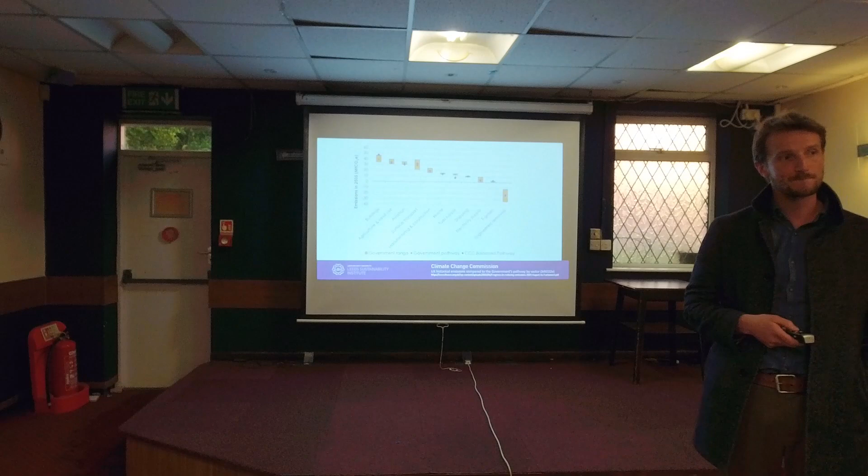But of course, once you build it and build it right, it's there for a couple of hundred years. No, it's a great question. This is operational carbon emissions for buildings, because the construction industry is there too - so that bit is building. You could add those two together and it's an even worse story, but all we're going to talk about today is operational energy consumption.

And there's a whole other area of research we can talk about, called embodied carbon emissions - things like, is it better to use wood or is it better to use concrete, that sort of thing.

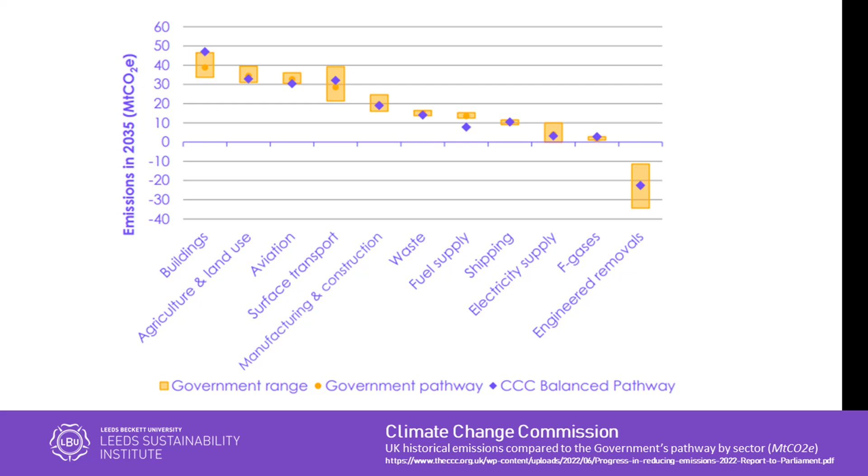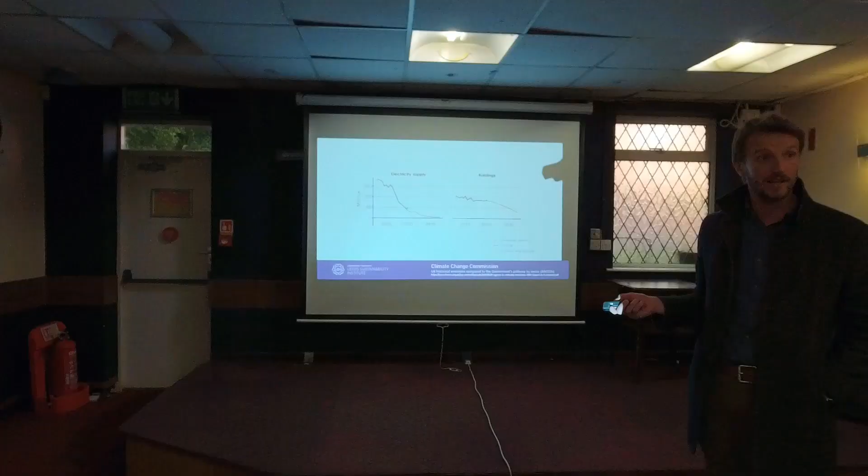At this point there's a colour change - not everybody might be able to see it - which marks the prediction, so they're predicting into the future. The electricity supply just carries on in the curve, maybe tails off a little bit, so that seems okay. For buildings, we're sort of flatlining, and they're just anticipating that suddenly we're going to make a load of reductions.

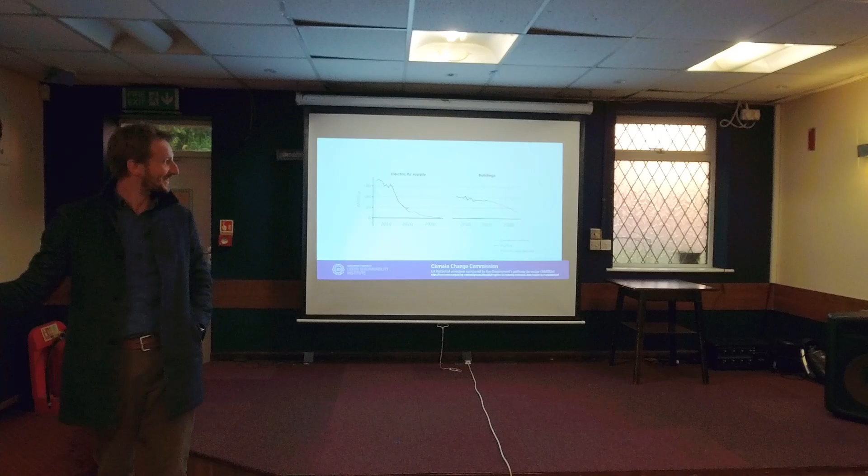Am I in your way? Can I move a bit? Cameraman, am I allowed to move this way? My fault for saying I've got some people - if everyone doesn't block... then I've blocked these people here. Do I stand up? Yes. No, now - how about this side? Stand. Yeah, better, a lot better, yes. Cameraman, happy? I can point, I don't need this now.

That's good. So we've basically done nothing for the last decade in buildings, but we need to make a reduction. So how are we going to do that?

Is that due to government policies? Partly, yeah - well, mostly. Subsidies to lots of things being withdrawn. So the question was, is it just because of government policy? Well, government policy exists to solve market failure. So the government didn't cause the market failure, but it certainly hasn't fixed it.

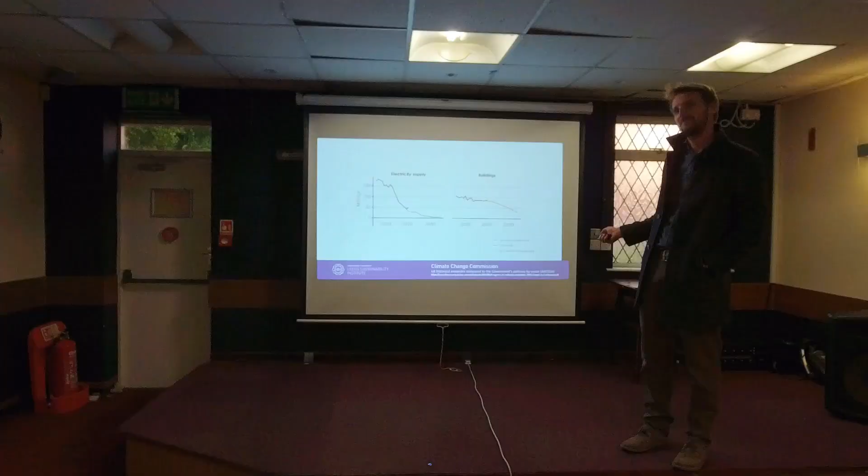You did say that line downwards for buildings is what we need to do, rather than that sort of forecast. Yeah, so it's the government pathway. I would give it a different label if it were me.

Okay, but we have decarbonised our economy quite a lot. And how have we done that? We've stopped using coal. This is a graphic which shows the coal use in the UK over time, and you don't need me to explain it because there was a lot of coal use and now there's not very much - that is a really significant change.

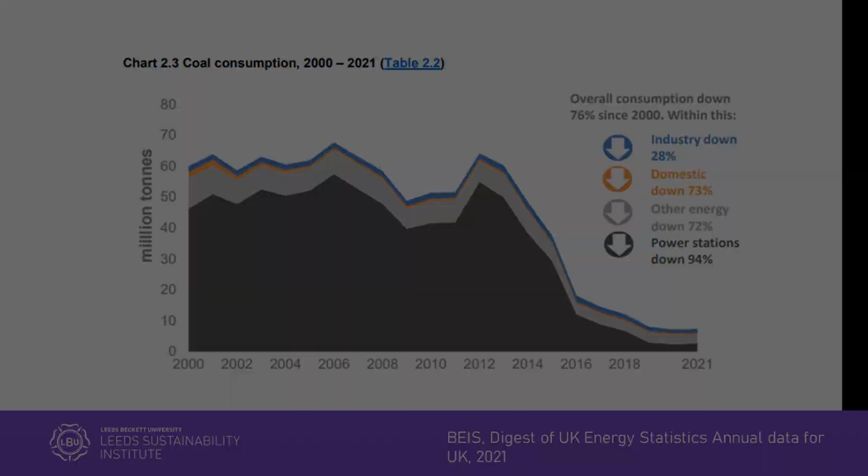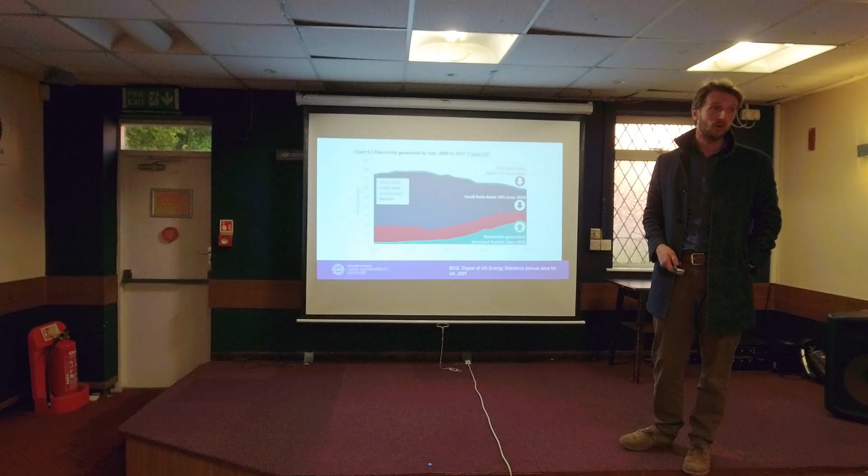But we've replaced coal, so we're using a lot more gas to produce our electricity - we're still relying on a lot of fossil fuels. This graphic shows all fuel use for making electricity, so electricity doesn't just come from coal, or it didn't just come from coal, it doesn't just come from oil, it doesn't just come from gas, it doesn't just come from nuclear - it's a combination.

So over time, we've reduced our reliance on coal, but we're still using a lot of gas. There's a bit of red which is nuclear, another topic we could discuss but perhaps not for this talk. The green is renewables, so we're replacing a lot of the blue with green, and that's great, but there's still a lot of blue left, which is the fossil fuels. But we have reduced total emissions as well, so we are actually generating less.

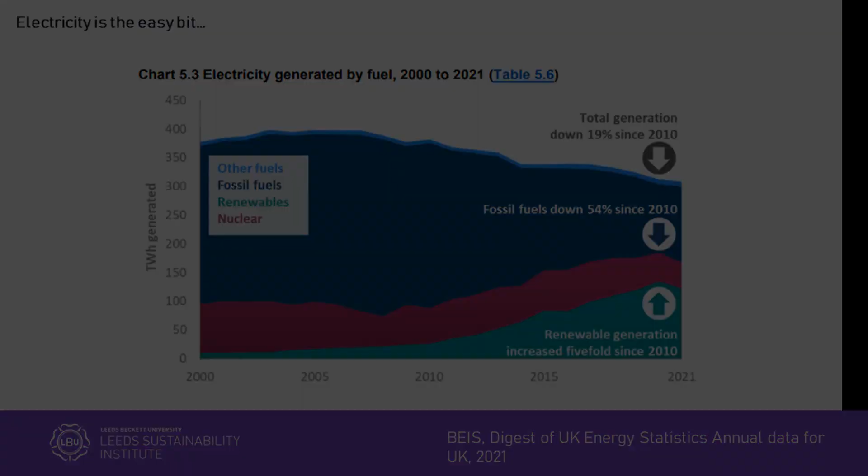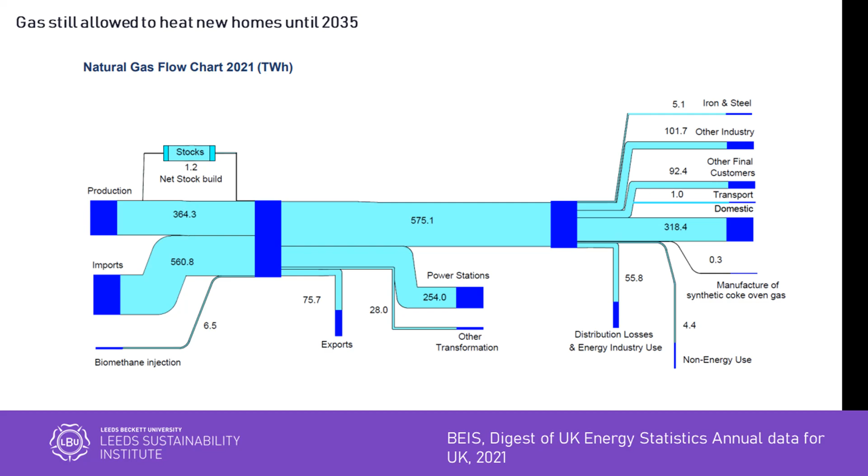So we're still using gas, and that's a real problem because most of it's to heat our homes. It's really hard to just switch your heat to renewables the way we're switching our electricity to renewables. We can continue to switch our electricity to renewables, but it's really hard to switch our heat.

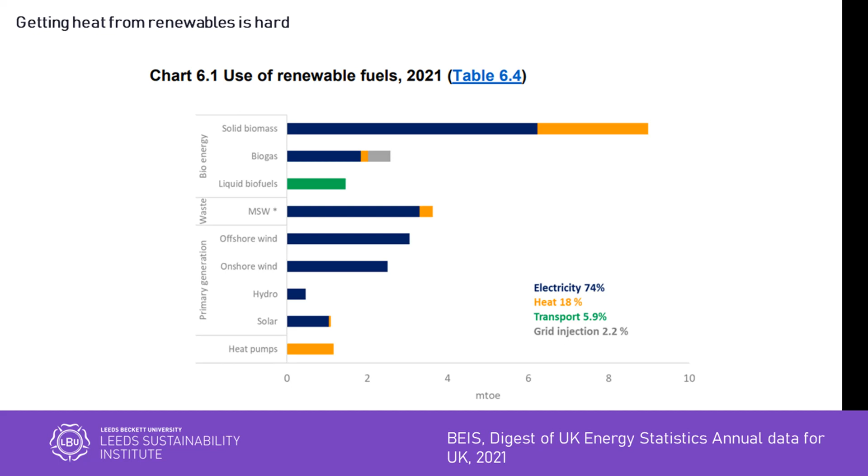This is a graph showing all of our different types of renewables. We've got biomass, a bit of biogas and liquid biofuels, waste incineration like the one over in the Leeds Cross Green area, then offshore wind, hydro, solar, and heat pumps. All of the blue ones are electricity, so almost all renewables is for electricity. It's really hard to do heat with renewables. There are good reasons for that, I'll show you in a bit.

So why don't we just use all of that electricity that we can apparently turn green to heat our homes? Surely that's just a natural thing to do. If we can make green electricity, we must be able to make green heat, just use electric heaters. And then we come to my favourite graph of the talk, which explains why we can't just switch over to using electricity to heat our homes.

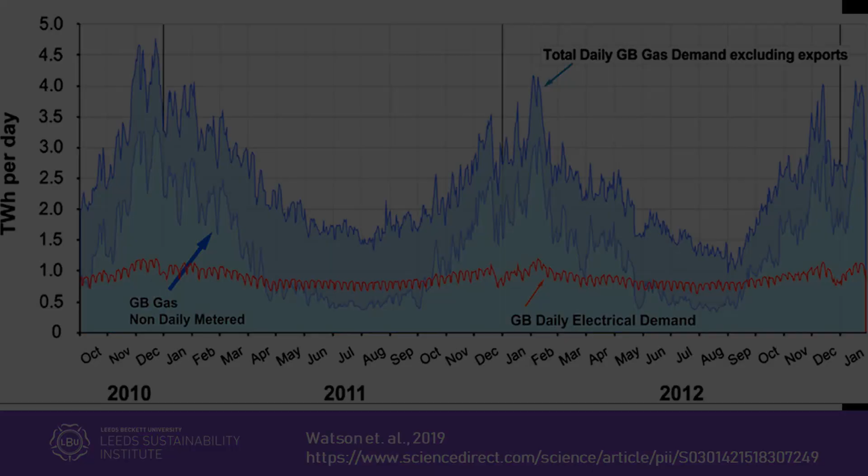This graph shows our annual energy consumption for gas, counting through summer, winter, summer. You've got this big spike, it's Mount Everest in the middle. Our electricity just sort of flops around a bit, like the Yorkshire Dales, going up and down but nowhere near the Himalayas. We call that peak heat. So everybody in the morning on, say, the 7th of February, it's cold and turns the heating on. We use a tremendous amount of energy to heat our homes, more than three times the amount of available electricity.

So if everybody suddenly had electric heaters instead of gas heaters, the grid would blow up. It just couldn't do it, it just couldn't cope.

So you've all probably heard of heat pumps, for right or wrong. The idea is you can get three units of heat for every one unit of electricity that you use, so you don't just use one for one.

Am I losing anybody at this point?

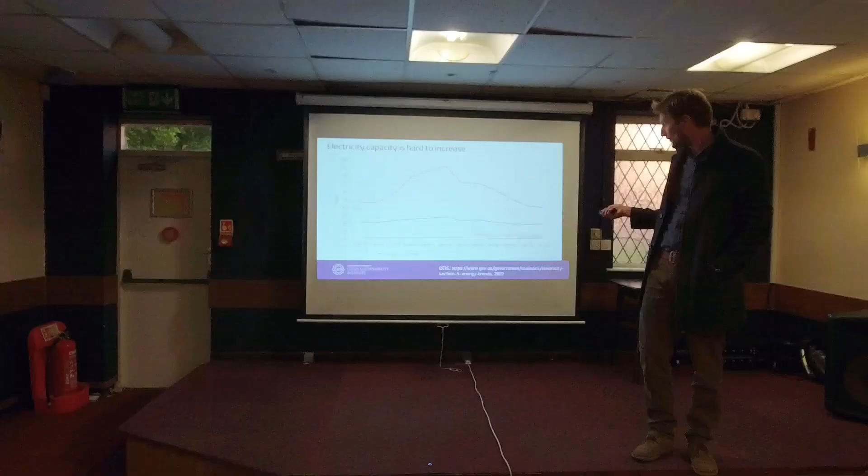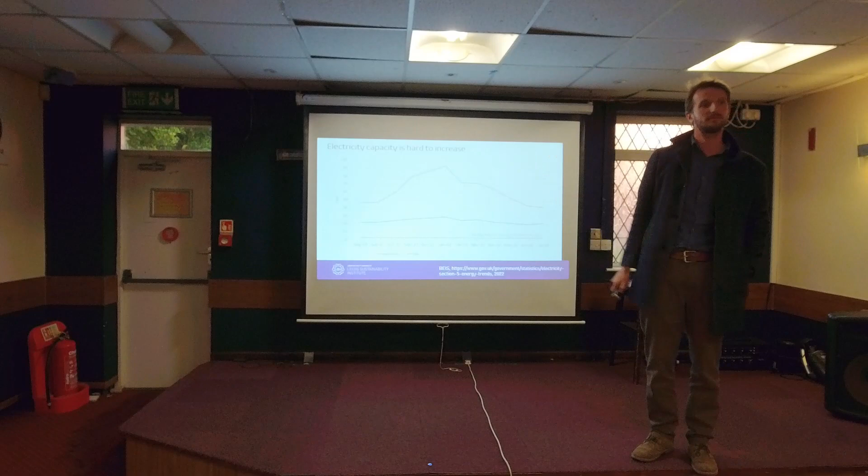I'm about to throw onto the line a nuclear power station. So that's one nuclear power station, that green line. Did you see it go on? Yeah. So how many would we need to crank it up from the Yorkshire Dales to our Mount Everest? It's just way too expensive, even more expensive than retrofitting homes.

And the government knows this. This is their main concern. This is why they want to retrofit your homes. They say it's because they want to keep you nice and warm and reduce your fuel bills, but it's because nuclear power is so expensive.

Okay, so why don't we just build new efficient homes? Why can't we all just live in new energy efficient homes? Why do we have to have homes that use so much energy?

So what we're going to do is talk about the Energy Performance Certificate. Many of you will have one of these, and many of you who do have one won't know that you have one. Does everybody know what an Energy Performance Certificate is or should be, even if you don't have one? Yeah, okay, so it's a guess, an educated guess, at how much energy your home uses.

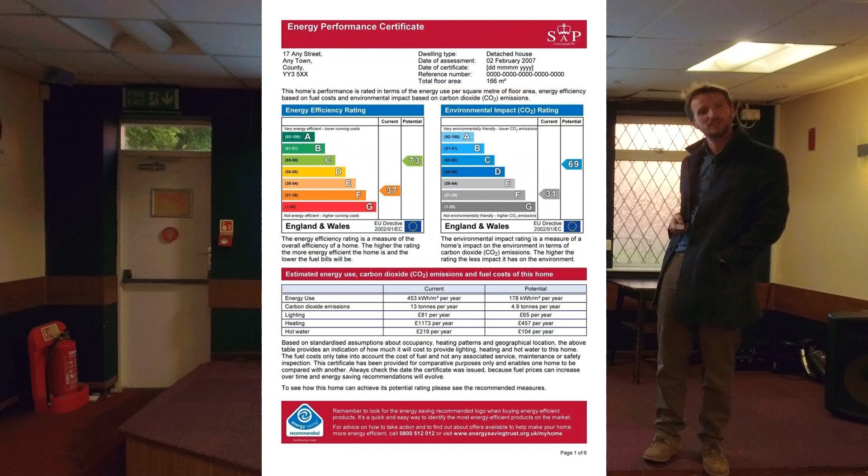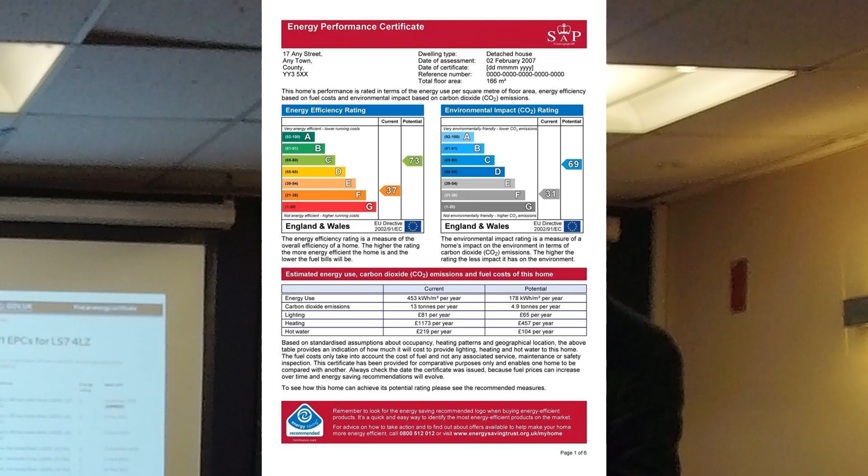This is what they look like, and you can go and look yours up, or look your neighbours up, or look up 10 Downing Street, or anybody's EPC if you want to. It's all freely available, which you may or may not know. Basically you get this colour coding mark, like you get on your fridge or your TV. It gives you a ranking, because that's what the government thinks the level of information we need is: colour coding.

I do tend to agree sometimes, but anyway, let's have a look. So this is that colour coding. The colour codes go A, B, C, D, E, F, G. A is the best, and G is the worst. So they're in the colours, I hope you can see the colours.

So that's the percentages over there. What we're going to do, and this is the number of homes, and this is everybody - let me just check it works. So we're going to see, well, the question I asked at the beginning of this set of slides was, why can't we all just live in nice new homes that are efficient anyway? So I'm going to add all of the new homes that got produced in 2021 to the graph, and you're going to see what happens.

Did you see it? I'll take it off. I'll do it again. Right.

New homes are great, but they're meaningless in terms of the scale of the problem. So they're a distraction sometimes. They can sound good, they're flashy, and politicians like to say they're building lots of new efficient homes. That doesn't scratch the surface of what the major challenge is.

Government have a requirement to get almost all homes to a C. There are exceptions you can get if you live in particular, peculiar, or unusual homes, which is fine, and that should exist. So currently, 60% of us are not at the target the government wants us to be at.

The interesting thing, I don't know if anyone picked up on it, is why are these new homes on B? Why are they not on the A? Building regs don't require it. That's another talk. Okay, fine. So we have to sort out the new homes.

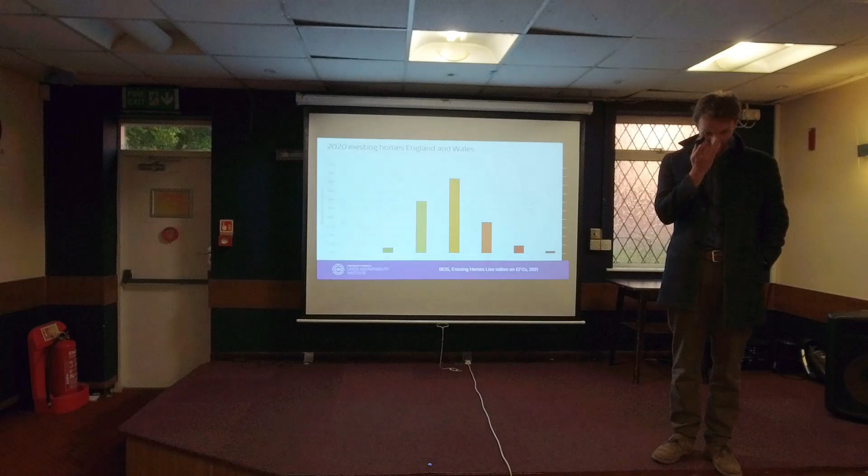So this is the same graph. What I'm going to do is outline them in black, put a black line around them. What's going to happen this time is, I think the black lines are going to stay the same to remind you what they were like in 2020.

And then the colours are going to change to show you how successful we were in 2021 at bringing homes up to a C. That's it. So that was it before, and this is it now.

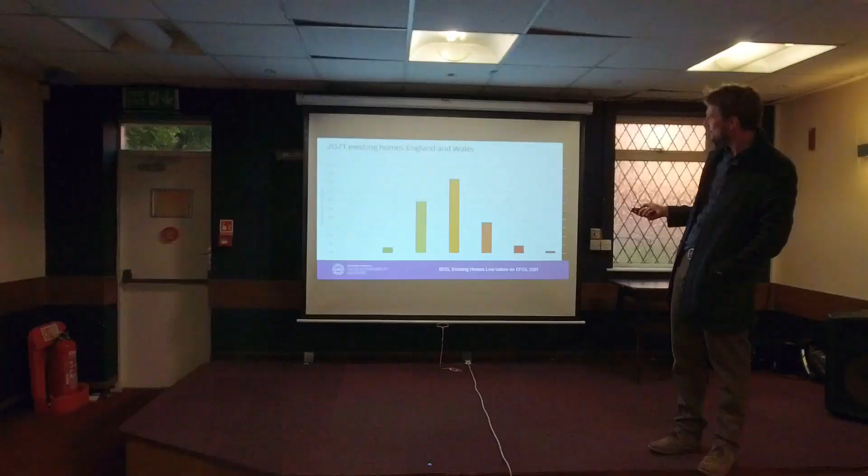So what's happened is the other way around. All we've done is taken a few E's and dumped them into D, and a few D's and dumped them into C. So the new builds aren't going to solve it, and the current approach to retrofit isn't going to touch it either.

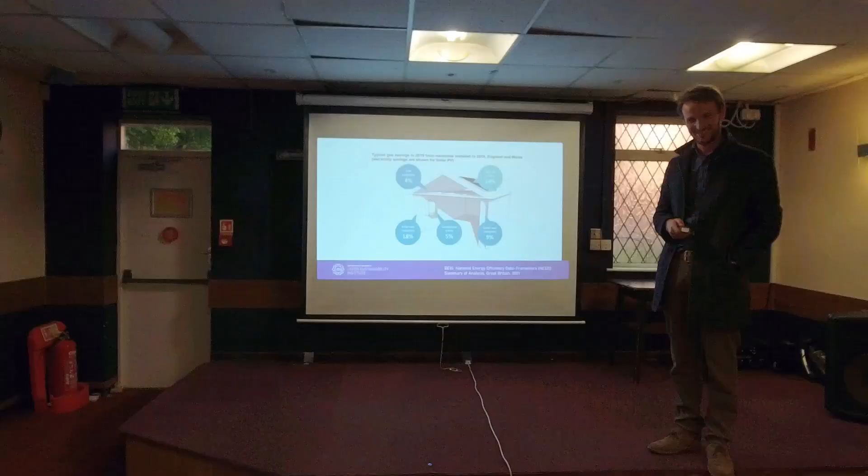I'm trying to remember if there's a positive slide in here for you all to go over. Right, we are saving energy in homes. Some people do, so that's the whole country, but some people get really good help, and there has been a lot of progress. So this is a slide to show you what the government says these sorts of technologies, or these sorts of retrofits, can save you on your fuel bills.

Now, they're actually a lot lower potentially than you might have thought. So if you insulate your cavities, so you've got a cavity walled home, it's uninsulated, get it insulated. Does that bring you up to a C? Does it mean it's fixed your heating problems? No, because cavity wall insulation only saves you about 9% of your fuel bill. So you've still got a lot of heat loss going on.

A new boiler will give you 5% saving. Loft insulation, 4% saving. That's because most people have already got a little bit of loft insulation. If you had zero loft insulation, you would still save like 10% or something.

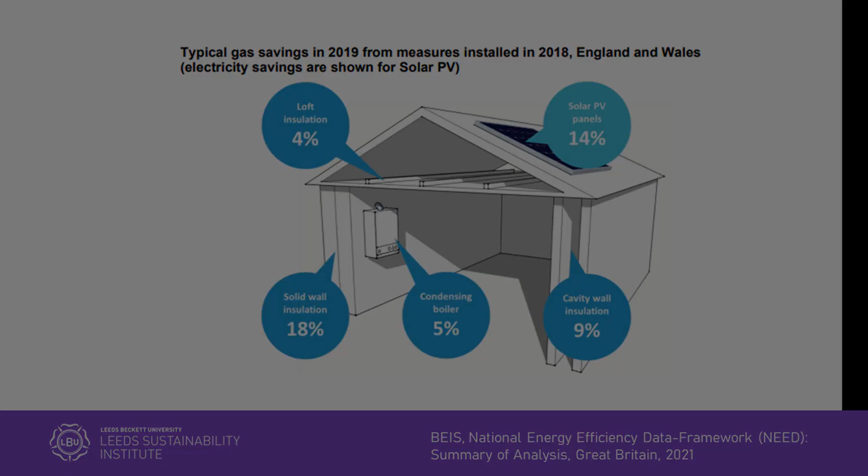Solid wall insulation, which I'm going to talk about later if there's time, I'm talking too much already. We're going to talk about solid wall insulation later. That's just to show we were making progress, but we've not been making progress for the last decade because of energy prices.

This is another depressing slide to show that each of these different colours is a different type of insulation, and over time, the performance of these drops. It's really obvious when you think about it. You put stuff in your loft, then you've disturbed your loft insulation. You don't clean your solar panels, they don't produce as much, so just something to look out for.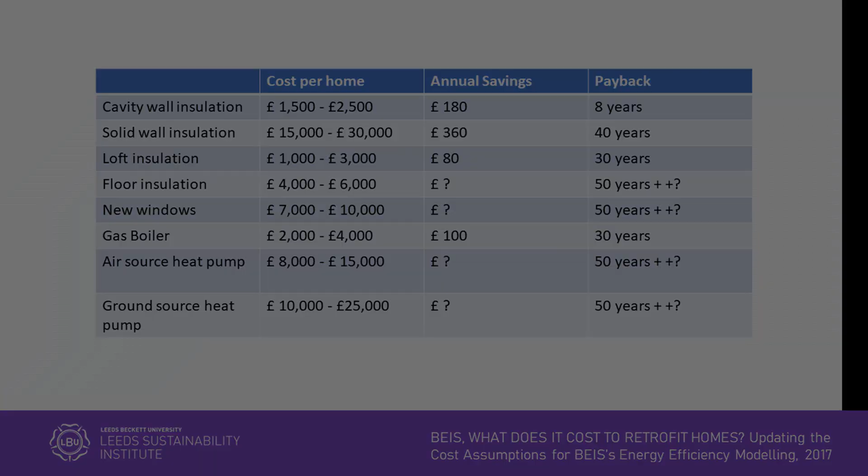The most recent research we've done is over 50 years for a lot of these. So to ask us to pay for it is a hard pill to swallow if we're only looking at cost. And there's another talk about all the other wonderful things that retrofitting your homes bring you other than just fuel bill savings. This is just one of them: the NHS have identified that excess cold in homes can potentially cost almost £900 million a year.

So the savings to society, if we saved it, would be 15.3 billion. So there is a very strong argument that it shouldn't be up to us to retrofit our homes.

So in 2013, they could have just said, we're going to have a 20-year or even a 10-year long policy, which means you can invest in getting the supply chains and market conditions ready to insulate homes. But they didn't do that. They said, okay, we're going to have a 2-year policy here, then another 2-year policy, then we'll extend it by 2 years, then we'll switch again and have another 3-year policy, and we're currently in Eco 4, which has got a 4-year policy.

That was only possible because of the co-heating test that we produced, which looks like this. It's an incredibly boring thing: we heat up a home, we know how warm it is, we maintain a certain temperature inside a home, we know how much energy we put in to keep that home at that certain temperature, and we keep it there for 4 weeks.

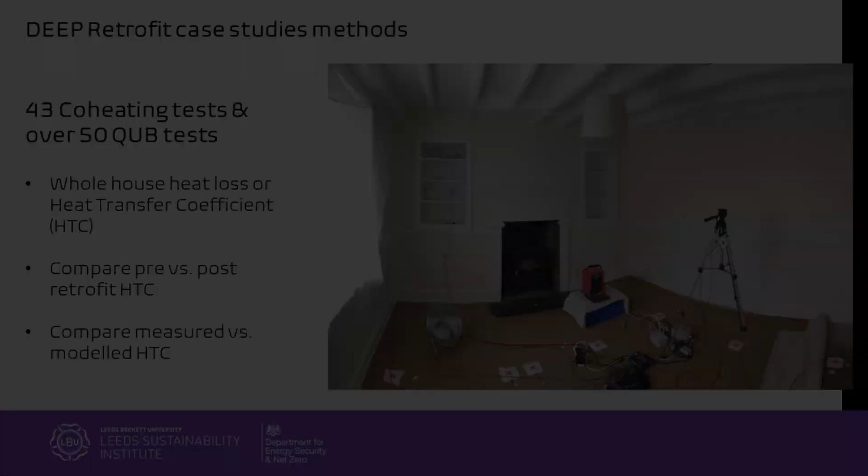And we know how cold it is outside, we know how much sunlight is hitting the room. What we can do is a very simple energy balance, with a little bit of complicated maths, to get an overall average amount of energy that house has to use to increase its temperature by 1 degree. It's as simple as that, and nobody else had done it. Now we've published guidance on the protocol for doing this test, and it is now the standard used internationally. So it's a really big deal.

But we don't own it, we've given it, so everyone now references our protocol. And what that means is other people were able to verify the things that we were finding. So we did work with Joseph Rowntree and York City Council 30 years ago to say, I don't think your buildings are built properly. They don't match the designs that you've been given. You're paying for buildings that aren't delivering. So the house builders didn't listen to us for 20 years, and then eventually other people started using the tests, and now we have identified that there is a performance gap.

And this is what that graph shows. So this is just a test of 32 homes, something like that. The white bars is what the house should have used. The black is the extra that it used. So these are brand new homes, not retrofitted. These are brand new, straight off the production line. This chap uses more than double what it was designed to. Most of them are minimum 10% more than they should have done.

And I guess I'm quite sympathetic if they've got a little bit more energy use than perhaps they should do. But this is not really acceptable.

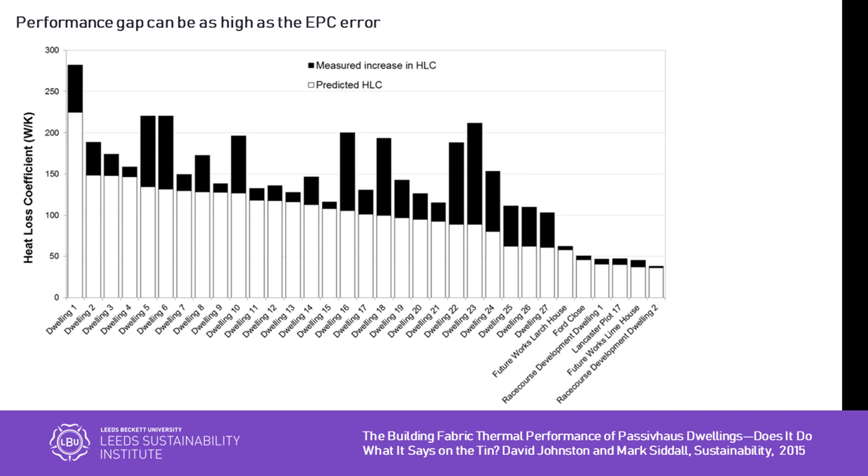Really good homes that are very careful, you might have heard of some of these, they're called passive house homes. They still have about a 10% overshoot. But that's fine when your absolute number is tiny. 10% of 10 pence is 1p, who cares? Whereas 10% of £5,000 is a lot a year to ask someone to pay, let alone if you're up at 50%.

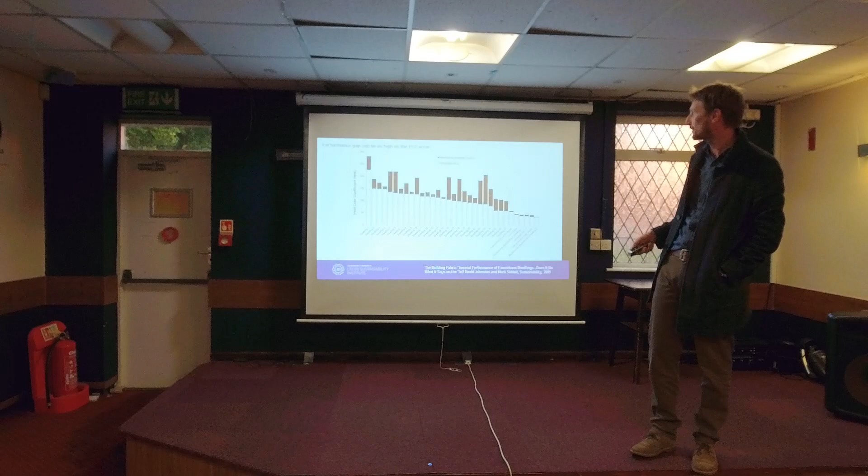Okay, so that's where we came from. This is why we keep doing what we do.

But we've moved beyond just that test, so we now look at how people would use heat pumps more effectively. That's another talk we can do. This is about who the heck is going to buy a heat pump. That's what that project was designed to do.

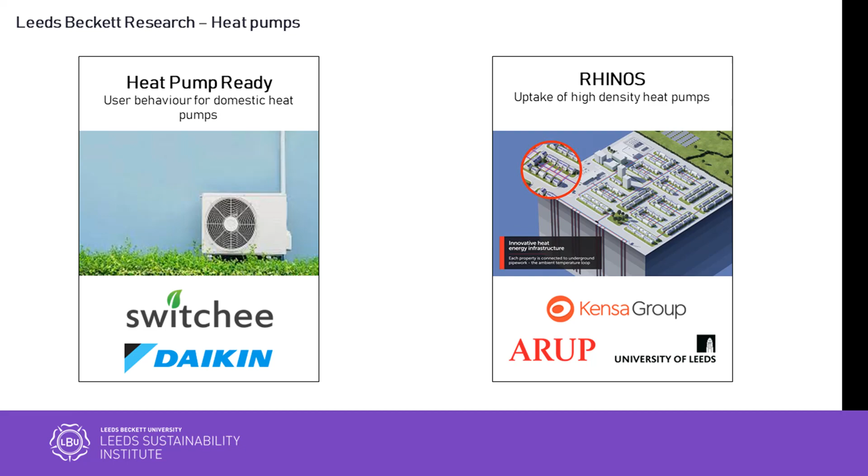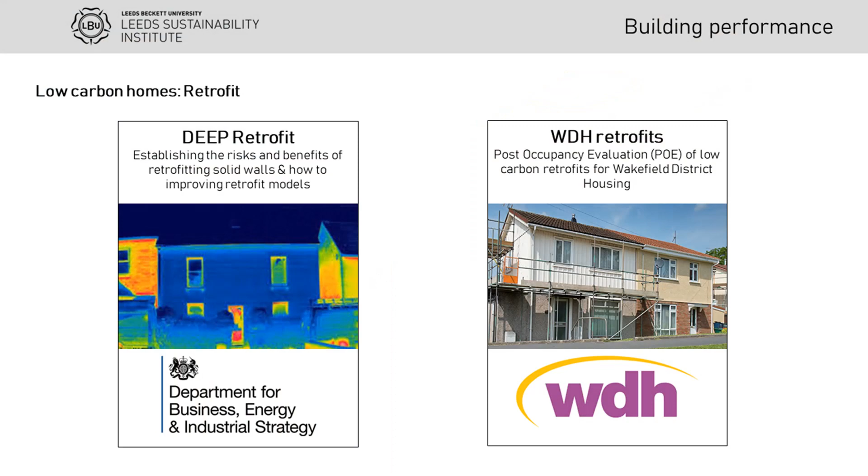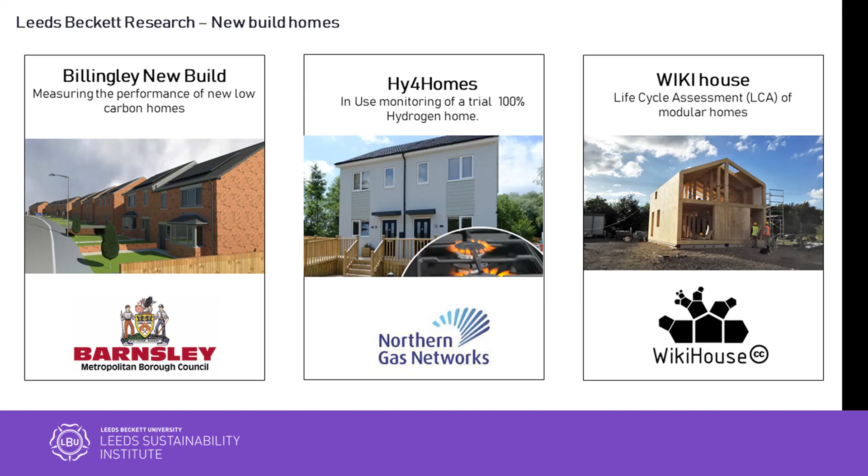Similar situation here - someone's gone and done a retrofit. They want to know if it works, so they get us in to test it. And they want to do that on a national scale. The problem that we've got at the moment is lots of different people go in and check retrofits in lots of different ways, and no one can compare retrofits between Leeds and Manchester and London and Paris.

Okay, so the UK Green Building Council asked us to look into how we can standardise how we assess retrofits. And this is the project I'm going to talk about today, the Deep Retrofit research project. So this is a government-funded project, £3 million, 3 universities involved, we were the lead, and we retrofitted 14 homes across Yorkshire. These are solid-walled homes, except this one, which is a non-traditional home. We put in loads of different stuff.

The idea is they wanted to know what happens when you retrofit. Does it save the energy it should save, or doesn't it? Also, one of the major problems we've got with retrofitting solid-walled homes is it's so blooming expensive. Do we have to do the walls, or can we just do everything else? Because we'd much rather do that. So we looked at that as well.

And one of the things we talked about as well is how do you do it in a low-risk way? And that's what this whole house approach thing means. Over the course of the last 30 or 40 years, all of our homes might have had double glazing, maybe, and then maybe loft insulation, maybe new doors, maybe some of us have got cavity wall insulation. But each time, only that one thing was done.

If you don't consider how the loft insulation interacts with the wall insulation, you can cause moisture problems at the junctions. Do we need to worry about that, or is it fine? That's what we were looking at in this instance, so we deliberately did it wrong to see how bad it was, and then we made it right.

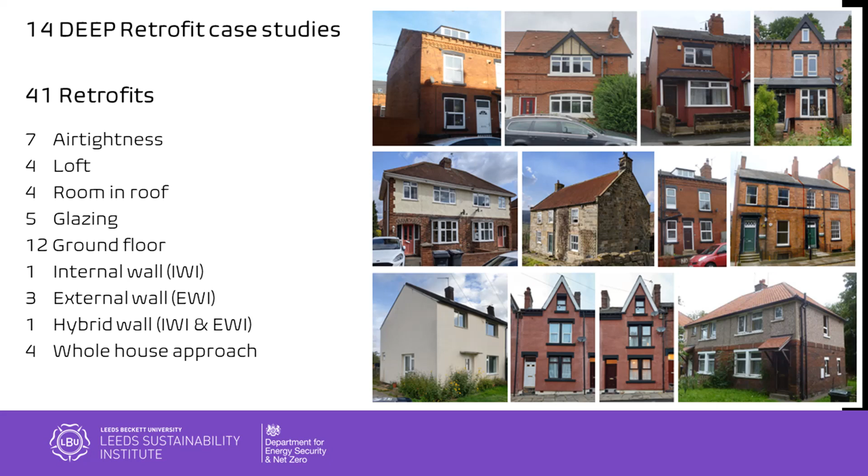So we looked at social landlords and private landlords. Some had very good reasons for not partaking in the research. If we've got the house for a year, that means a family doesn't have the house for a year. So that's fair enough. Often the institution was just too big.

They have a process with voids, they have targets they have to meet, they have a retrofit policy already, and taking one of their units -- because they're units, not homes anymore -- out of that system is just a faff. They've got to do 50 that month, and it's annoying to work out this one special one.

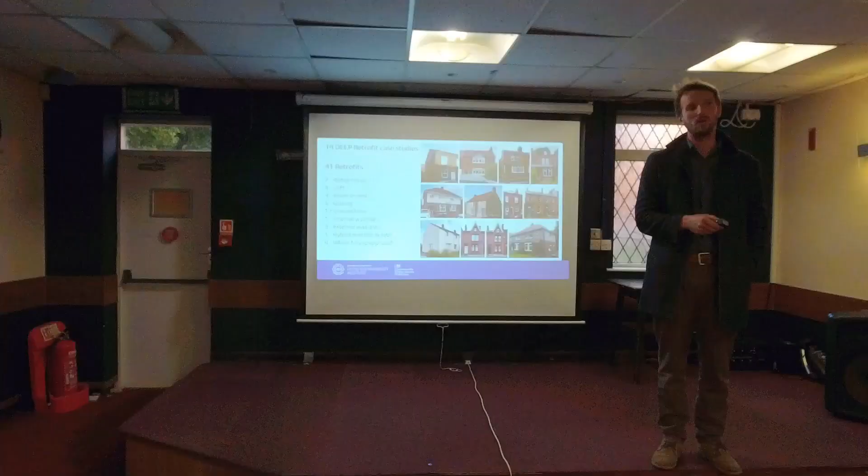Plus there were lots of contractual risk issues, like worrying we're going to burn it down, all that sort of stuff. It's just outside their normal operations, which is understandable, but it was a surprise.

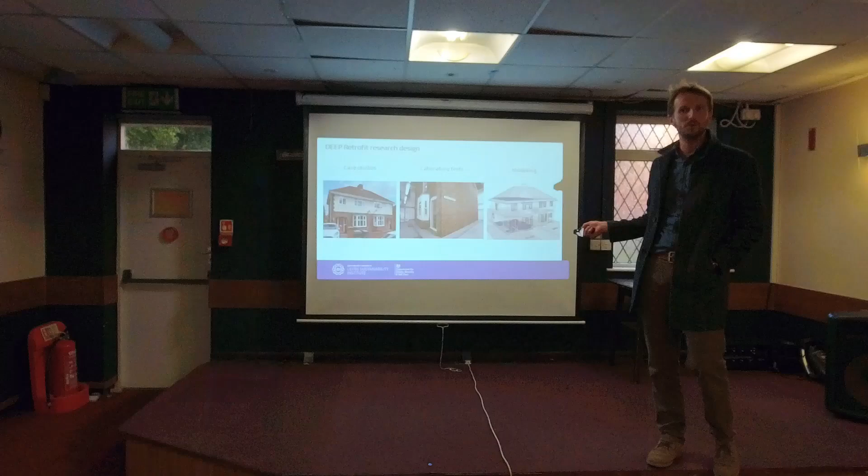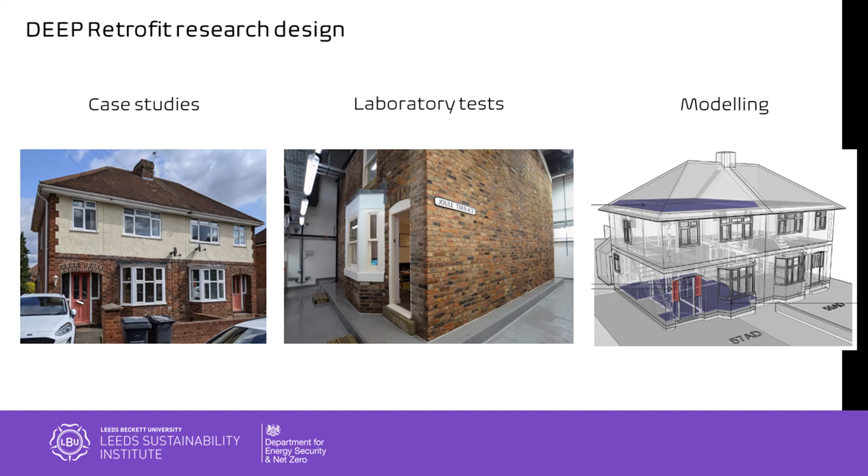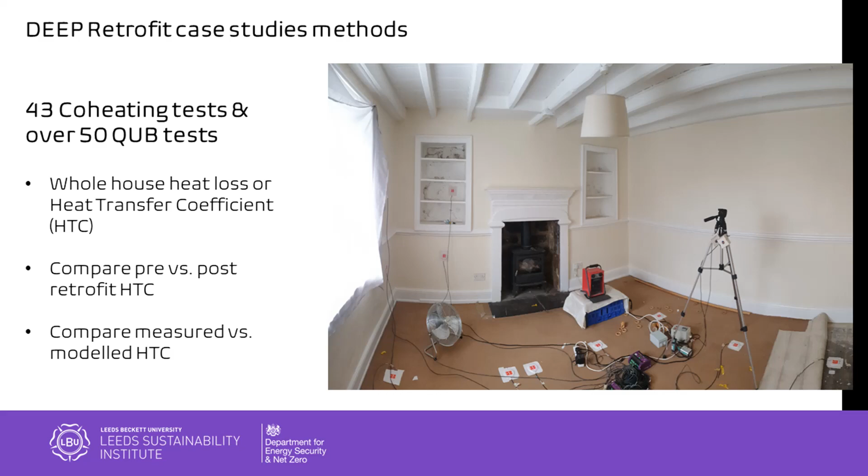I'm just going to talk about the case studies. There was laboratory work and some modelling work as well, which I won't touch on. This is the co-heating test I mentioned earlier, the thing that gives you that evaluation. It means we can see what the home was designed to improve by, how much it actually improved by. We can also compare what the EPC said to what it actually achieved, and some other modelling too. It's quite a good test to be able to do.

So these are some of the homes, and we did it step by step. We would do the loft and then test it. So we test it before we did anything -- this was the base stage -- and then we do the loft and then we test it.

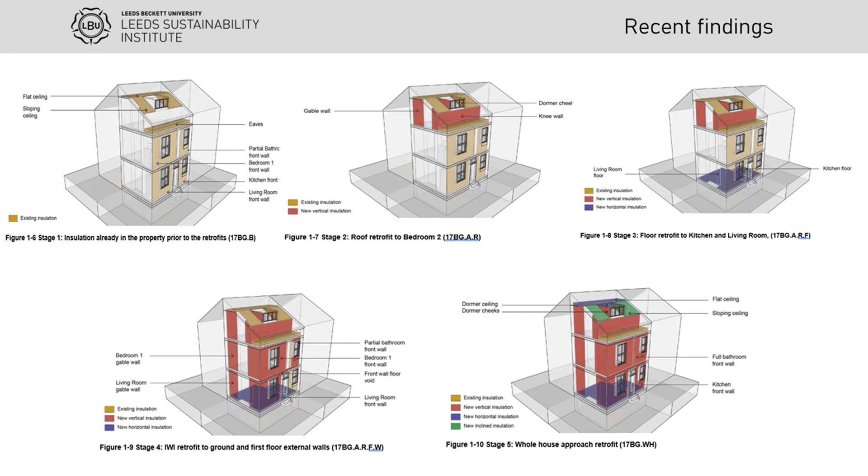We just test it as we found it. Then we put the loft in and test it again. Then we put the new floor insulation in and test it again. Then we do the wall insulation and test it again. And then we did those bits I talk about which join all the other bits together, and test it again. Some homes we did other things, some homes we put windows in.

You talked about the floor insulation, you said it came out very high, expensive -- I was quite surprised about that. Is that because you've got to take out all the kitchen? Is that all costed into it, or is it just assumed that that's the measure itself?

Our costs were the total costs. In the reports, we split it all down into what we call the retrofit costs and then the enabling costs. So the question was, why was it so expensive? A lot of the figures you get quoted are just the cost for doing the retrofit, but of course there's other stuff too.

There's extra skips, or some homes we had roofs we had to fix leaks in, and extra scaffolding up for a bit longer, or kitchens to remove, and plumbing to do, and electrics to change that aren't costed in the quotes you often get.

What we've done is identify where those costs differ from quotes, to be able to give government information to say you need to update your cost models to capture all of these extras. In some homes we were looking at, on average, a quarter to a third extra cost on top. So if the government has committed £1 billion to retrofitting, are they including that extra cost? Does the householder have to spend that extra cost, or does it mean only 750 million's worth of retrofit gets done? So it's useful information for them to update their cost estimates for policy.

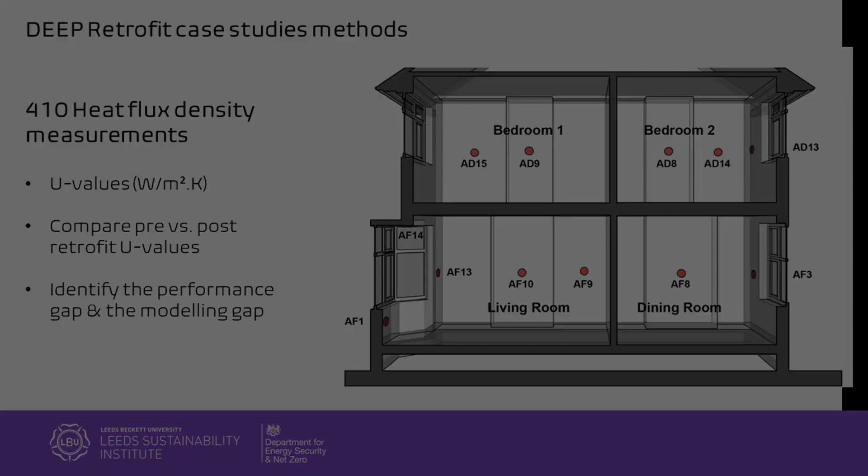So you lose heat through your walls, floors, and fabric generally. You also lose heat through air movement, so drafts in your homes essentially. We measured the drafts before and after. Did it do what it should have done? Did it suddenly solve all the drafts, or did it make absolutely no difference to the drafts?

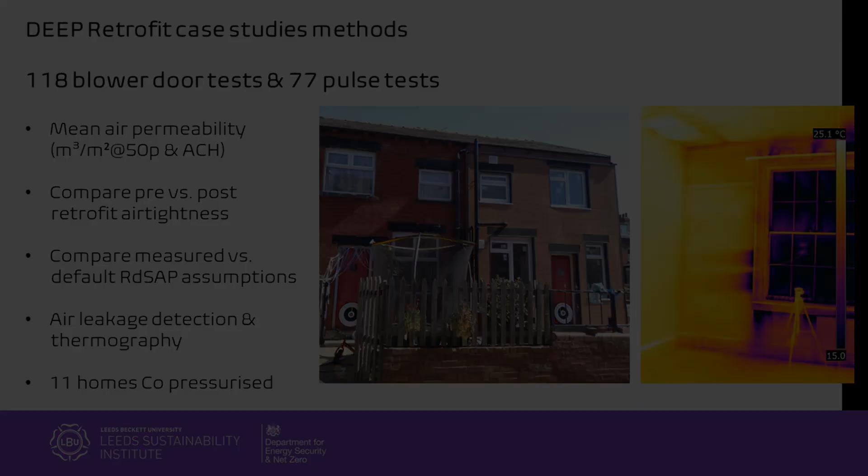That was important. The other way you can lose heat in a home is through the junctions. It's not through the plain wall, it's not through the cracks and gaps, it's where the walls meet the walls and the walls meet the ceilings. You can't measure those, you have to model those, so we modeled those.

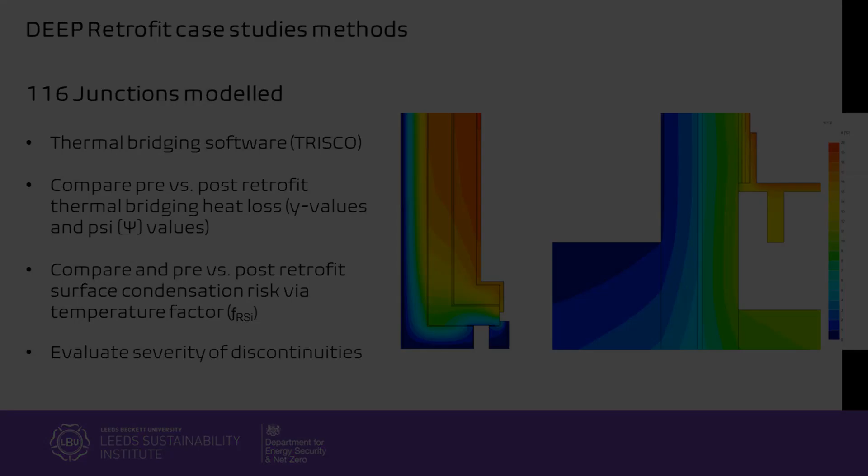They were okay. Really all you're looking at here is that loft insulation did basically nothing. We couldn't measure a real difference.

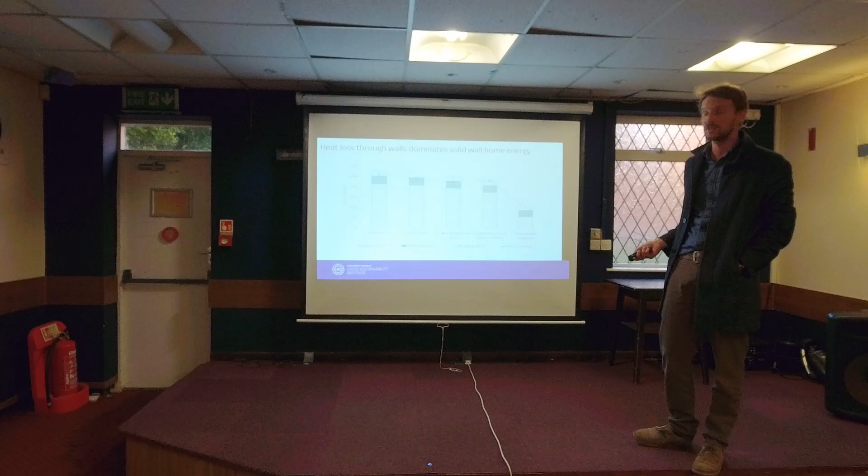So these things aren't making any kind of headway into the heat loss reductions in homes. We're just kind of messing around at the edges here. The only thing that made a difference was solid wall insulation. That's a really strong message to send to government, to say solid wall insulation is a special case. It's so much more expensive and problematic than all of the other things, and yet we're obsessed with trying to do as much of the other stuff as possible. We need to just be focusing on solid walls if our goal is net zero, and that's a change from previous policies.

When you refer to solid wall insulation, do you mean just the wall, or do you mean there was internal cladding or external cladding? It could be either. In terms of performance, it just depends on how thick the insulation is, front or back. There are lots of other issues, but in terms of just actual heat loss, that's really the only factor, it doesn't matter which side of the wall you put it on. Yeah, but the trouble with insulation in cavities, which is what a lot of people use, causes damp, doesn't it?

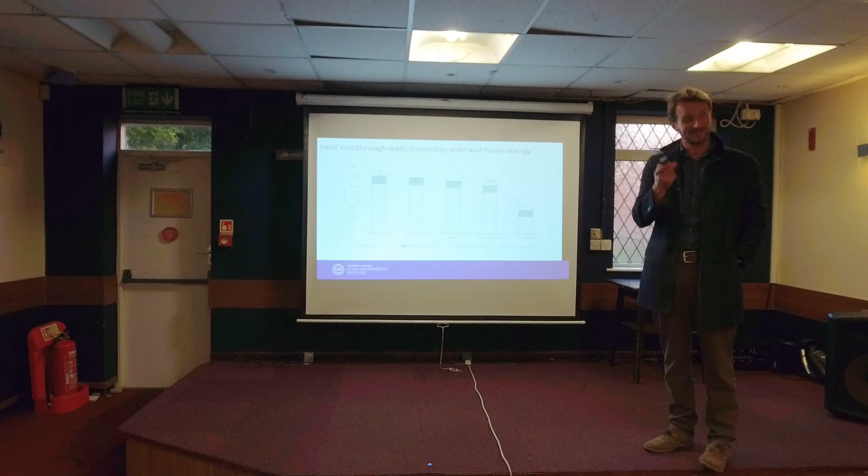It's not designed, it wasn't built and designed to have it filled. That's a really good question, thank you for asking. We didn't test any cavity walls, but I want to stick with the question because it's really important. There's so much information, misinformation, uncertainties and unknowns about all of these different things you can do to homes. In some homes, if it's installed in a certain way, or it's in a certain type of house, yeah, but not always, and probably not often. So that's really annoying for everyone because it doesn't really help.

There are some general guidelines which the general public don't know about, when it is and isn't okay. There are certain standards that can be achieved which will ensure that you're guaranteed, which a lot of people don't know about. And you've hit the nail on the head with exactly the problem. We're having the same thing with heat pumps now, we're having the same thing with solid floor insulation, solid wall insulation. We're trying our best to get simple messages out, and we would love to do a cavity wall project, but this was a solid wall project.

Well, I've had problems with cavity wall, and it was because they pump it in and they don't necessarily pump it all the way up the top, so you get a thermal bridge at the top. Yeah, and sometimes they don't pump it in the middle, and there's a thermal bridge there. And it's about quality and workmanship. You try and take that up to one of these guarantee organisations, and they might give you some mold resistant paint, and that's all they want to care about.

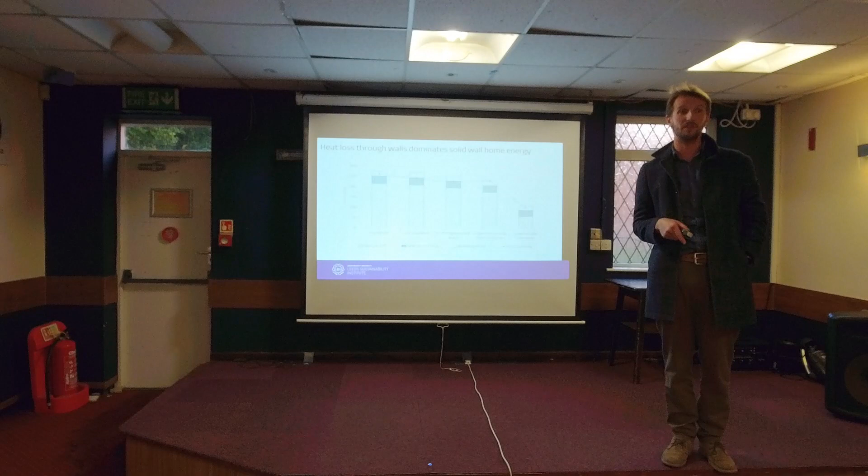So isn't it about that confidence issue that we're talking about? Until 2 years ago, there was no insurance-backed guarantees for any retrofits, even those that were funded by government. So if your installer went bust, government won't do anything. Now there is an insurance-backed guarantee, and every single retrofit that's funded has to go through Trustmark as an insurance-backed guarantee, which has additional stipulations on top to make sure it's put in the right walls and put in those walls properly. But that adds costs.

So you used to be able to insulate 1 million, and now you can only insulate 800,000 because it costs more to do it. So I did look at cavity wall insulation, and somebody said to me that I ought to just check what it takes to actually take it out again afterwards. So I did, and I found out that all the people who do that were very, very busy.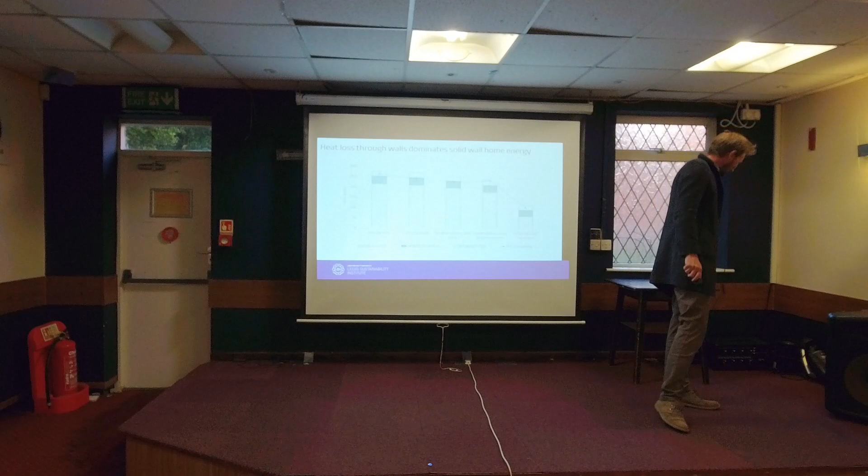Yeah, we've done it, we've taken them out. Sometimes it's soaking, sometimes it's fine. Sometimes there's nothing there, and there should have been. We've even found a bike wheel and some double glazing inside some cavities on one of our projects, which was interesting. That was a new one.

Right, wrapping up with some results. So we compared modelling to the measured data, the EPCs. We found out that yes, of course, the EPCs aren't accurate. So your coloured bar doesn't give you the exact amount of energy you use. How could it? But we've identified some ways that can be improved, so that's a nice thing for government to know. This is the PAS 2035, the standard we were just talking about.

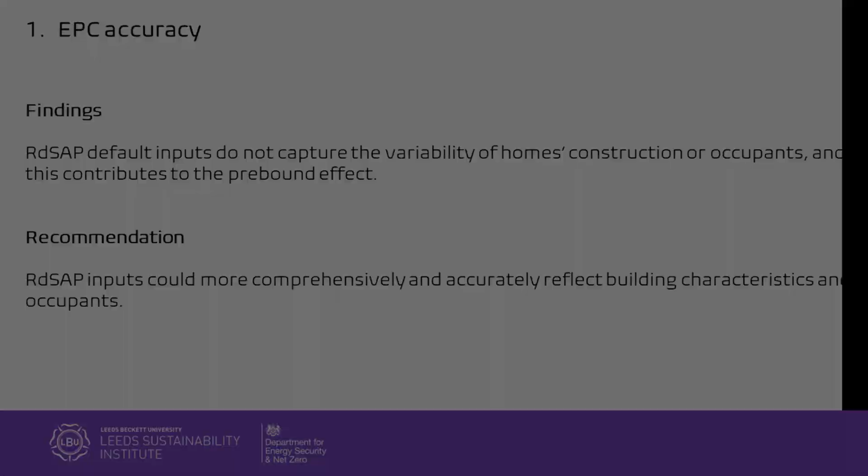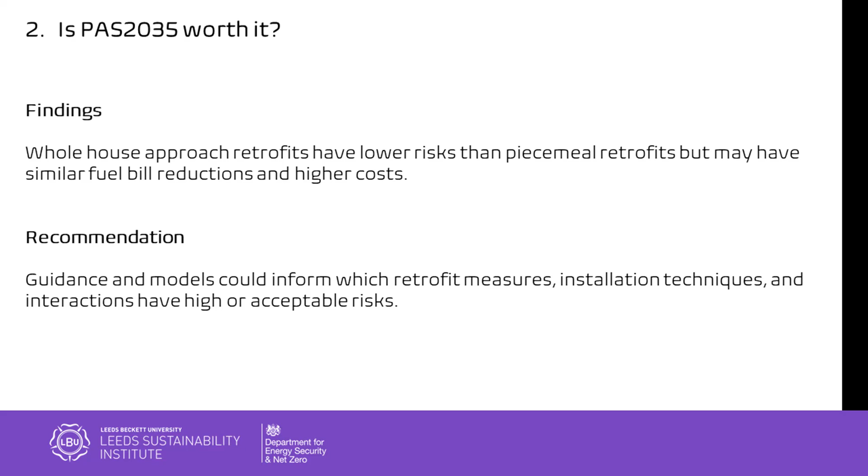It costs more to do it properly. So there's costs and benefits, and really we're trying to push a risk-based approach for exactly the reasons that you've got just in this room. And government are now more scared of homes falling down and Daily Mail headlines than they are about trying to do as many walls insulated as they can on the cheap. That's really unpopular with lots of people who now have to spend more money to do the things, but I guess it's really popular for the consumer, and consumer protection kind of trumps a lot of things here.

So we've identified, to find the middle ground, we hope this is what we've done. The standard says all of these different things that you've got to do, and we've gone and tested them and think, well, do you really have to do that? Or do you really have to do that one? Now we've got a better understanding: actually, yeah, you had to do that one, definitely have to do that one, but you don't need to worry about that one. And that one might cost £7,000, so you don't have to do that, which is an enormous benefit to industry. We're really hoping more of those guidelines can be put out there, so it doesn't cost an arm and a leg to do it properly, and we only do the things that are sensible. So we're trying to marry that balance of the two.

We talked a little bit about this one. Everyone wants to get their EPCs up to a C, and if you're in a solid wall home, pretty much the only way you're going to do it is by insulating your walls. That's really an important point that we're hoping government will take more notice of.

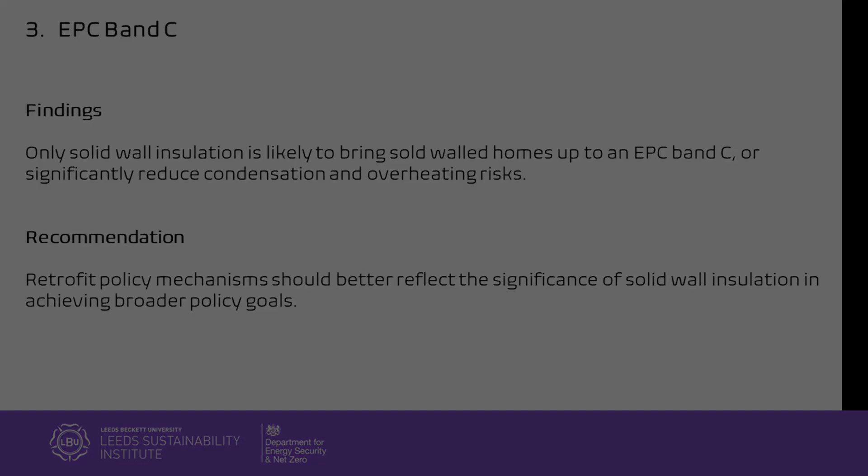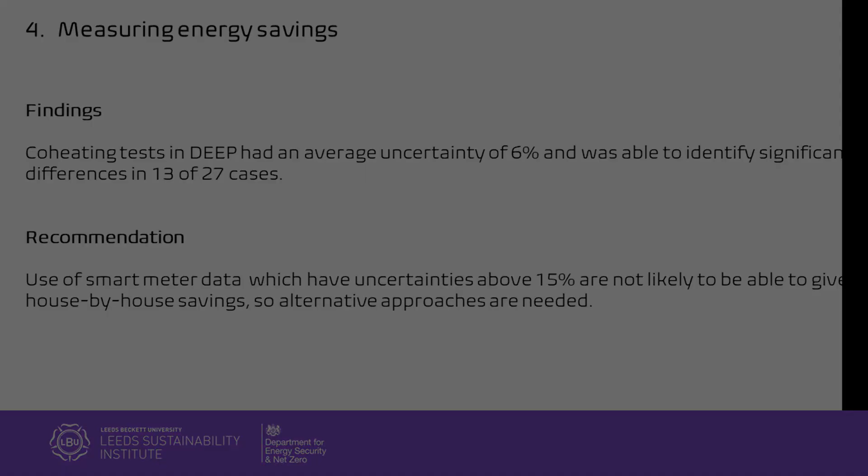You don't need to know, but it's hard to measure. Even though we spent £3 million, we still have lots of concerns over the measurements we took. So you might hear companies claiming they'll save you 20% or 40% of your energy bill. Firstly, they won't, because you now know solid wall insulation only saves you 18%.

So if anyone ever tries to sell you anything, you say 18%, that was on the slide at the beginning. Wrapping your house in thick foam is only going to save you 18%. So if anyone says they can paint your walls with some magic paint and save you 20-30%, you know they're lying, or at least they've been misled themselves.

So yeah, it's really hard to measure stuff, is what I found. We're releasing the results of this project, so you've all had an insight before government had even seen the results. So, good on you. It's going to be released in June, not July as it says there. We've got a big launch event at Headingley campus, which is really good.

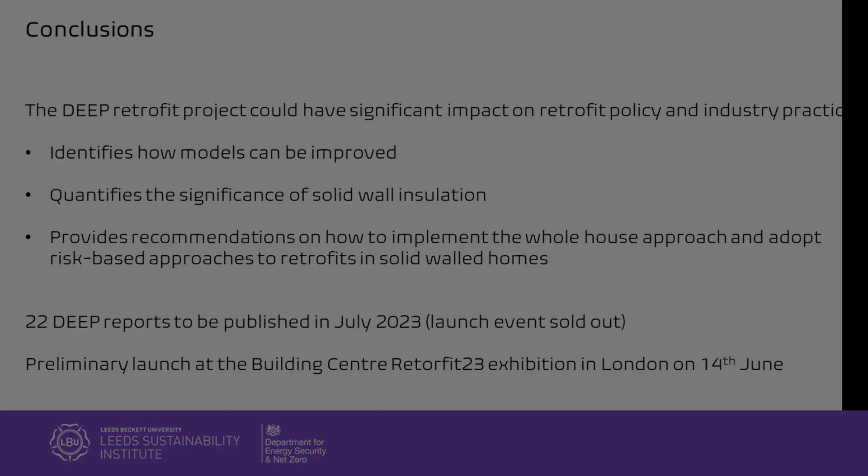Have you heard anything about this gas that's supposed to go into windows to stop energy escaping? So the question is about different types of double glazing. Double glazing sometimes just comes with an air gap between the two panes of glass, but you can put stuff in it to improve heat retention. You can get argon or different types of gas to go into window panes to make them more efficient.

Have you done any tests on that? We haven't tested any of those, but we did test secondary glazing as part of this project. You know secondary glazing? Yeah. They worked almost as well as double glazing.

In relation to double glazing, we need our rooms and houses to breathe, we can't absolutely trap everything in there. And of course they're putting these trickle vents into windows all the time now, and they seem to be getting bigger, with regulations associated with it. Is there any government regulation that specifies the breathability within a house, and how many vents and how much pumped air there should be? Yeah, it's called Part F of the building regulations for ventilation. There are standards based on room sizes and different uses of rooms for how much ventilation should be provided, and a maths equation for what that means in terms of the size of the vents.

What we talk about by drafts is air coming up from the floorboards, coming down through the roof, behind the sink, from where the toilets meet the floors. That's bad ventilation essentially - that's where mice poo, where flies die and spiders live. You don't want that as your fresh air, so get rid of all of that.